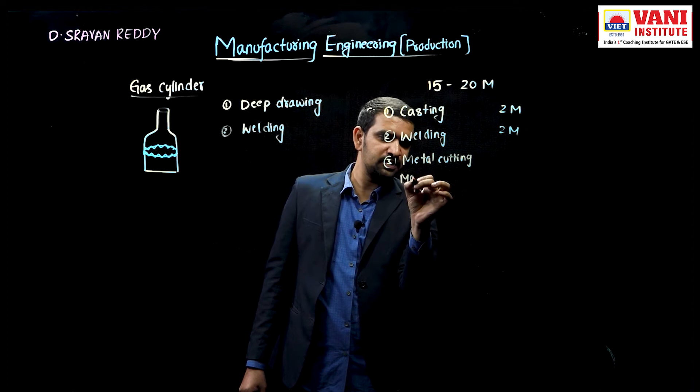The details of topics which we will cover are: casting, 2 marks; welding, 2 marks; metal cutting, machining, non-conventional machining, 3 to 5 marks.

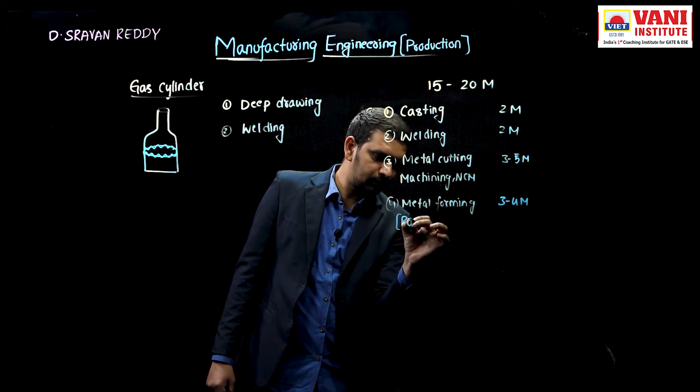Metal forming, 3 to 4 marks. In metal forming: rolling, extrusion, wire drawing, forging.

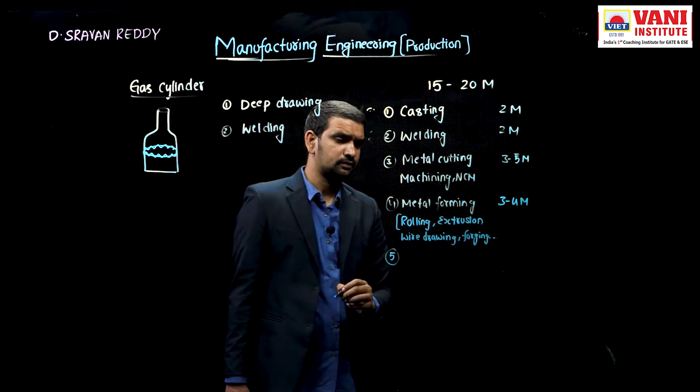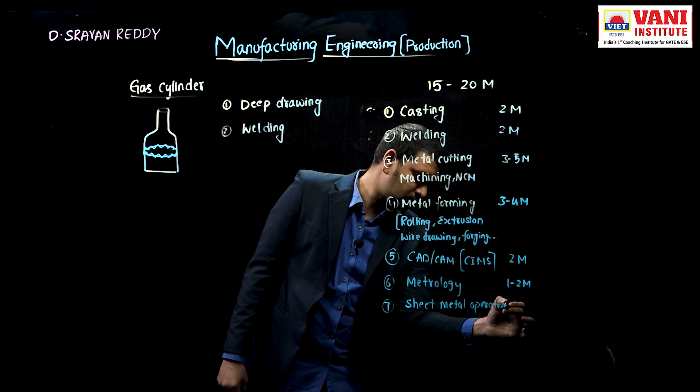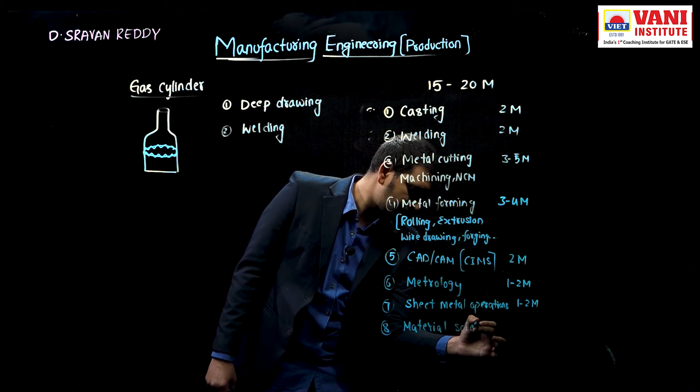The fifth one, CAD CAM or CIMS, 2 marks. Metrology, 1 to 2 marks. Sheet metal operations, 1 to 2 marks. Material science, 1 to 2 marks.

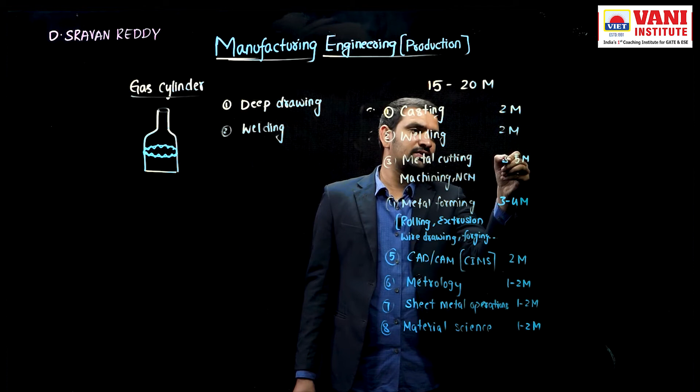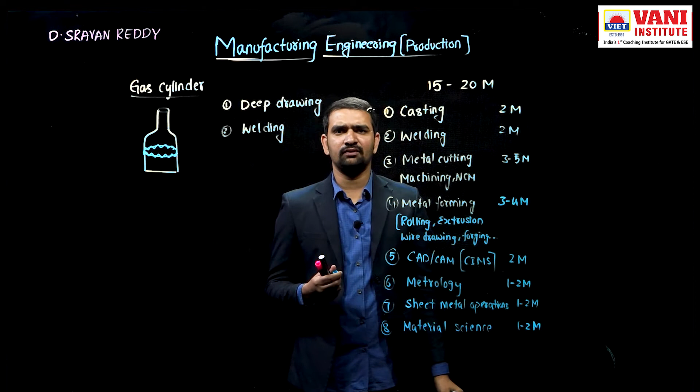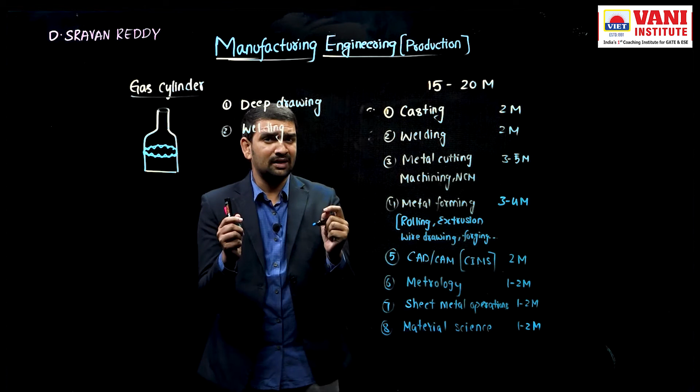If you count this: 7 this side, 7, 10, 12, 13, 14, 15 - minimum marks are 15, maximum marks are 20. In 2008 and 2013, from manufacturing engineering, 20 marks were asked, but every year 15 marks are asked from this subject. So if you focus on this subject, getting 15 marks is very easy.

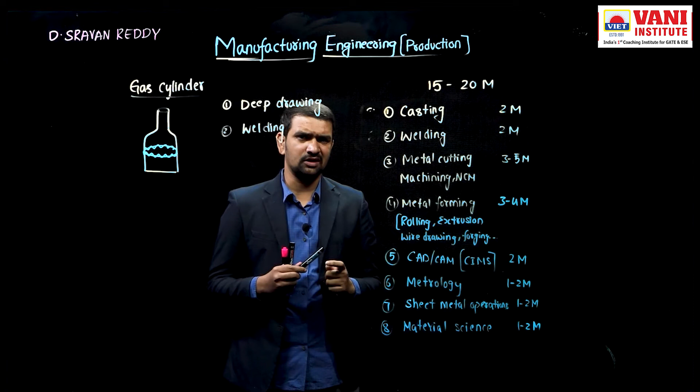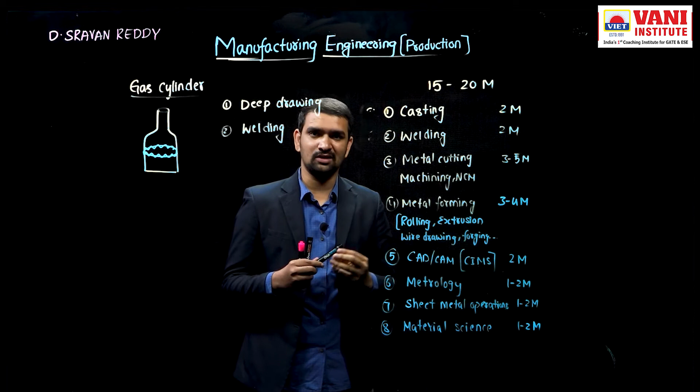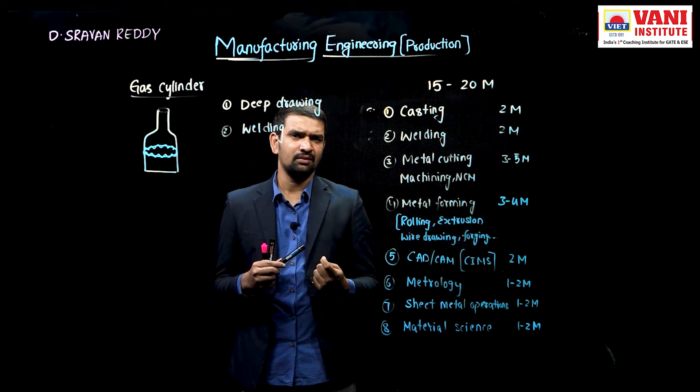Most students think that manufacturing engineering or production is a theoretical subject. But from the GATE point of view, out of 15 marks, 11 marks are only asked from problems. Only 4 to 5 marks are based on theory. Why does the examiner focus mainly on problems and not theory?

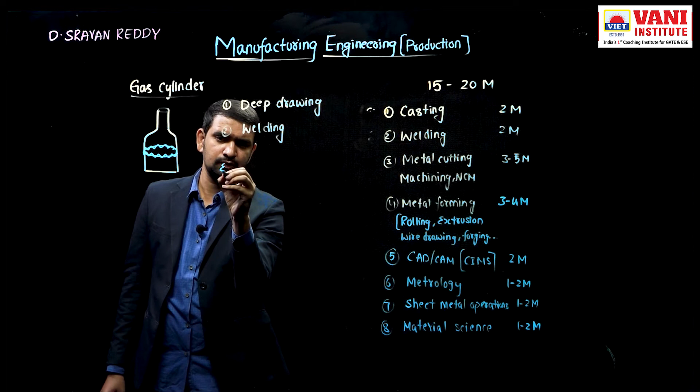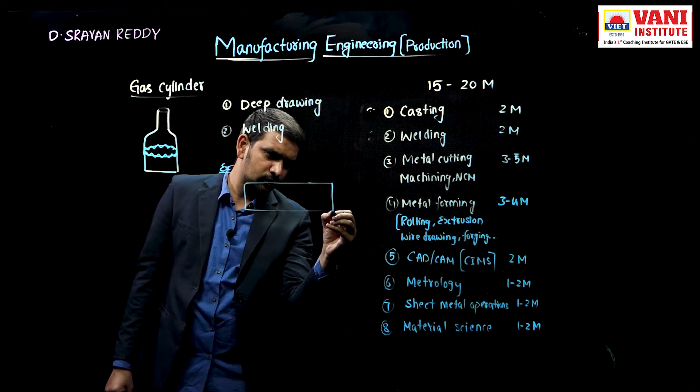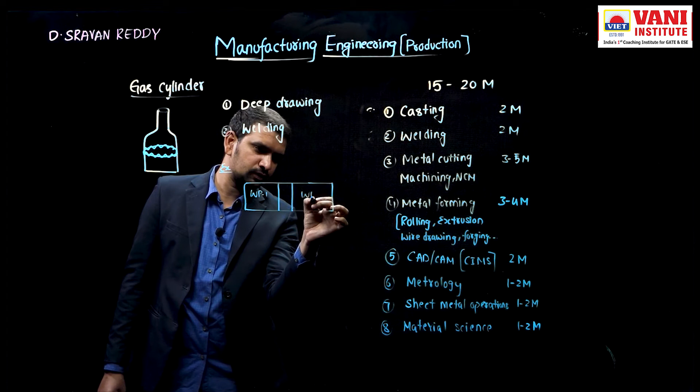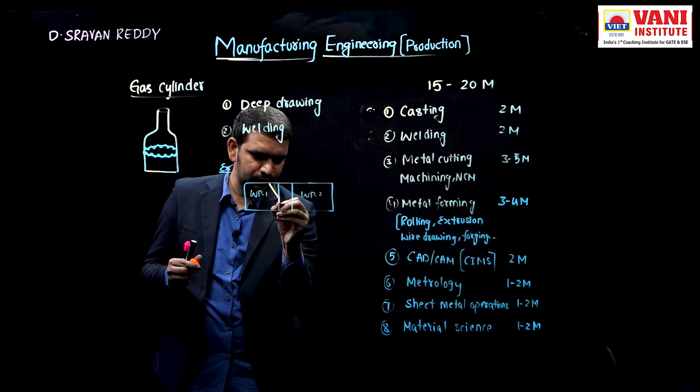Let us take one more example here. We are going to join two workpieces - this is workpiece 1, this is workpiece 2. After taking these two workpieces, you are doing the filing. After filing, the contact area increases.

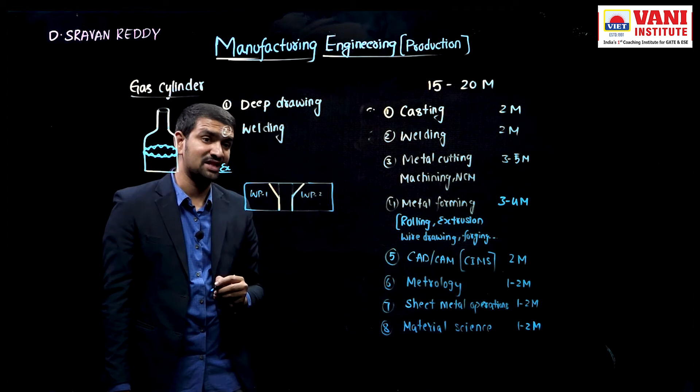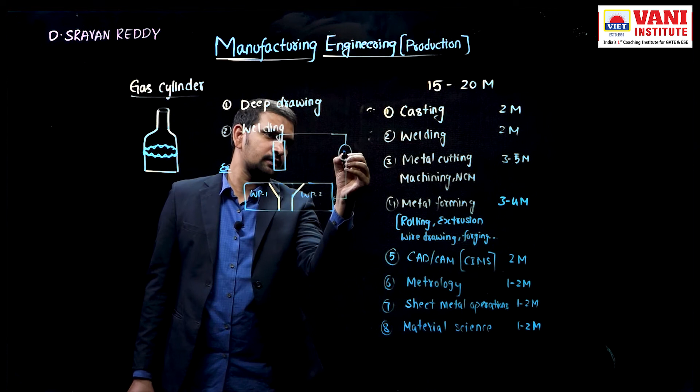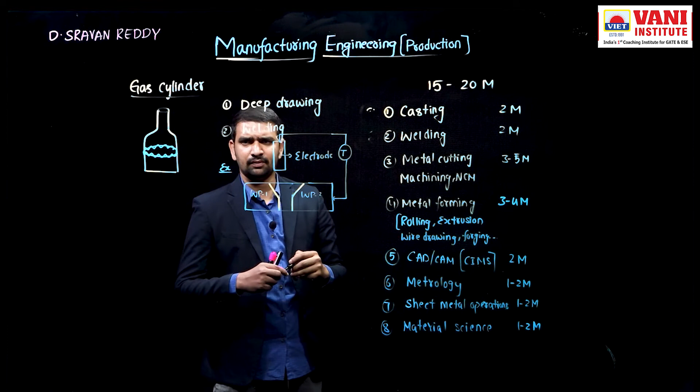Now we are using the arc welding transformer. In the arc welding transformer, for joining these two workpieces, we are using one electrode and a transformer - this is the transformer, this is the electrode. Before starting this, I am asking a few questions.

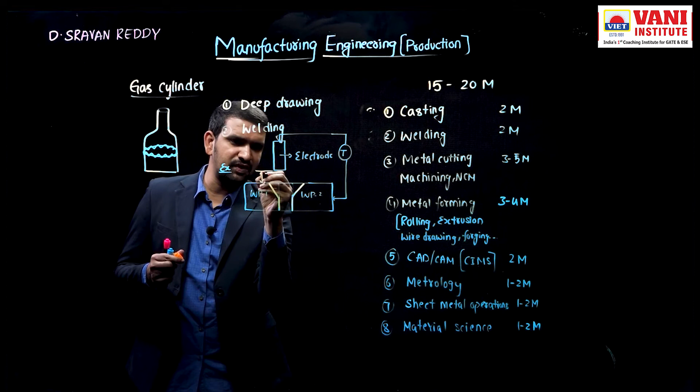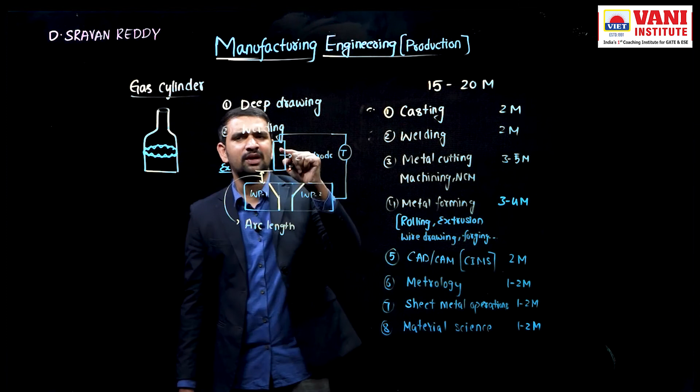Did you measure the distance between the electrode and workpiece? If you measured, what is the distance? What do we call this distance? We call this distance the arc length. My question is, why do we need to maintain the arc length? If the arc length is 0, what will happen?

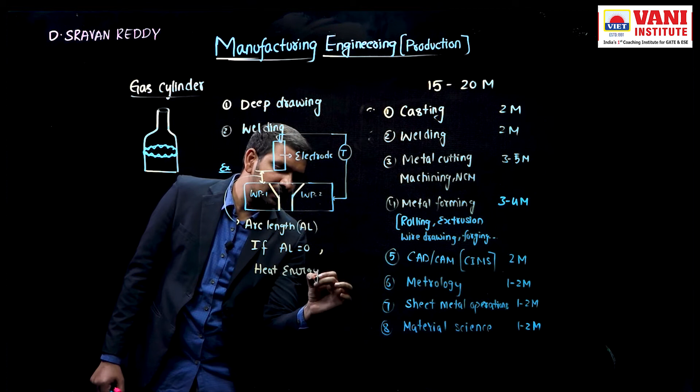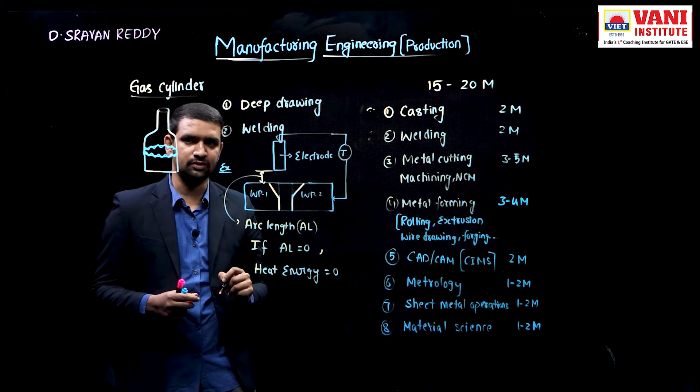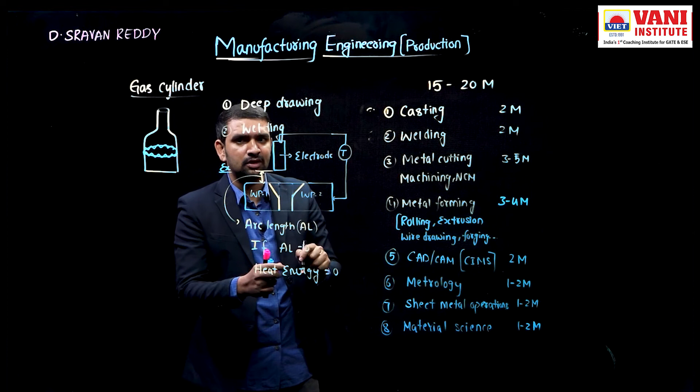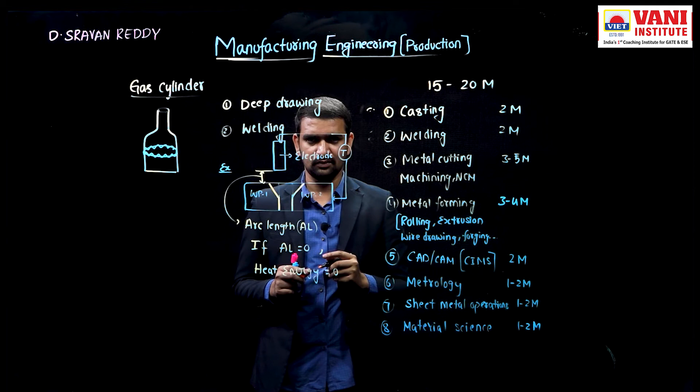If the arc length is 0, you know that heat energy is 0. Why is the heat energy 0? Because the circuit becomes a closed circuit, and if the circuit is closed, arc will not be produced. Or if you are maintaining too large a gap, in that case also arc will not be produced. We need to maintain the arc length within a range. In most cases, arc length is equal to the diameter of the electrode.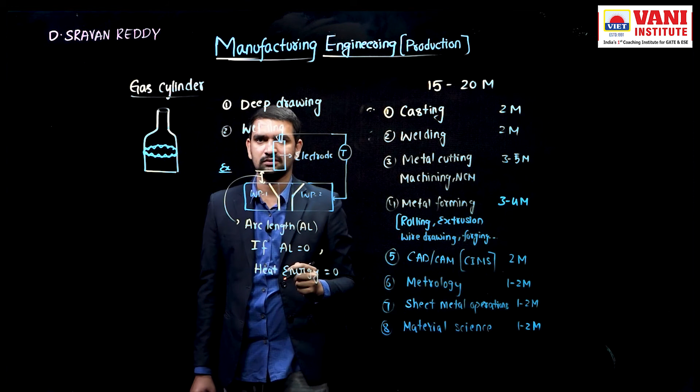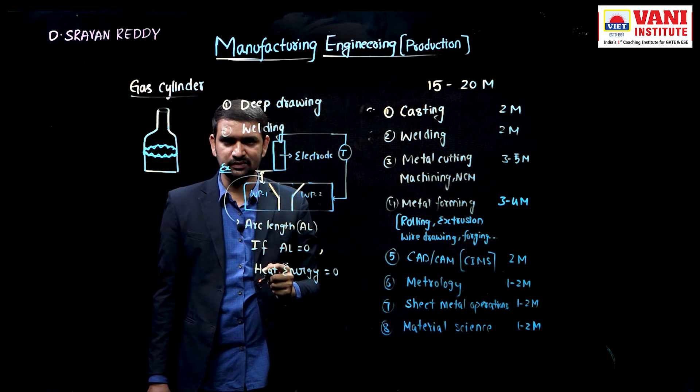One more question - we are supplying voltage and current. Can you tell what is the voltage range and what is the current range? Many students think the voltage range is 220 or 240 volts, like a bulb. This is not the bulb for telling that answer - for a bulb, voltage is 220 or 240, but in arc welding, the voltage used in our lab is mostly less than 100, though you can also use up to 200. There is no restriction, but in most cases the voltage range used is less than 100.

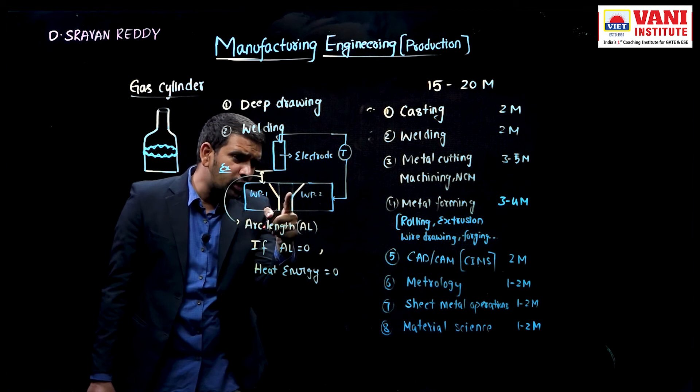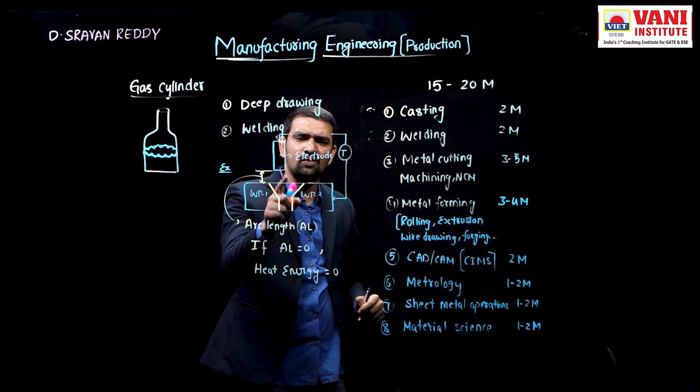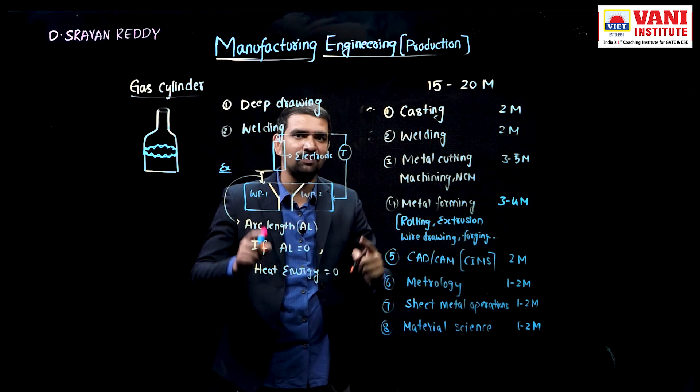One more question - before starting, first of all we should know how much heat is required for joining these two workpieces. How do you calculate how much heat is required for this weld bead? Based on that, we need to produce that amount of heat with the help of voltage, current, and time. If you don't know how much heat is required, you won't know how much heat should be supplied.

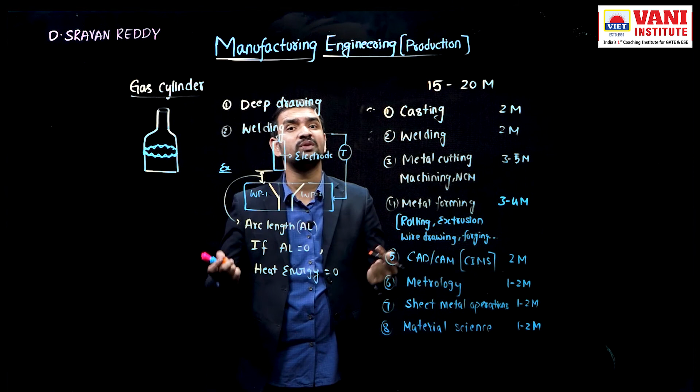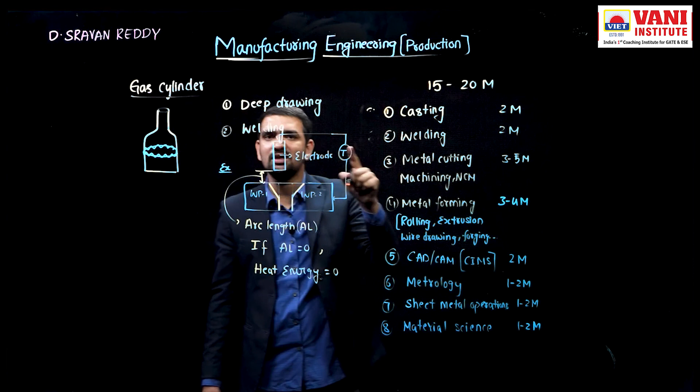At the same time, if you are supplying certain power, how much heat is generated? Of this heat, how much is lost through convection, conduction, and radiation? Exactly what amount of heat is taken by the weld bead? If we are not concentrating on how much heat is taken by the weld bead, and if the weld bead is not heated properly up to its melting temperature and not fused properly, it will affect the strength of the joint.

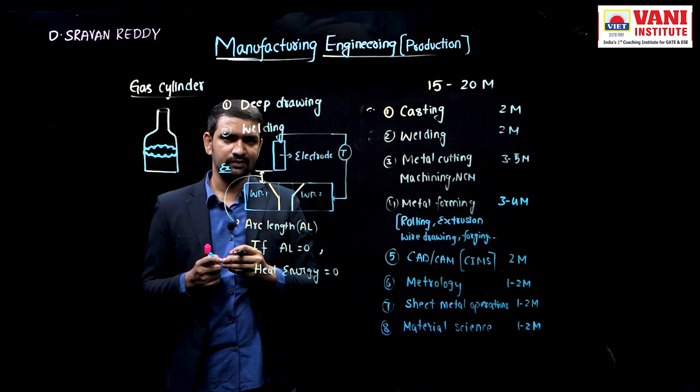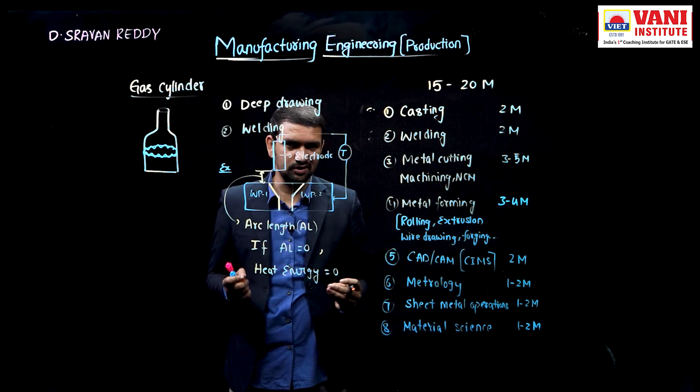Knowing all this is very, very important. The examiner mainly asks about the efficiency of welding - thermal efficiency, heat transfer efficiency, melting efficiency. You may not have heard all these words in your curriculum or while studying in college.

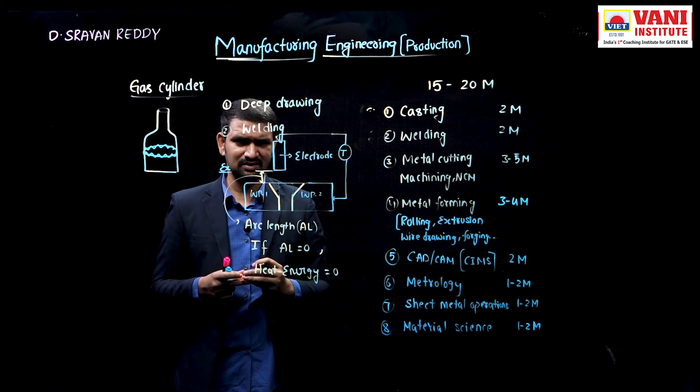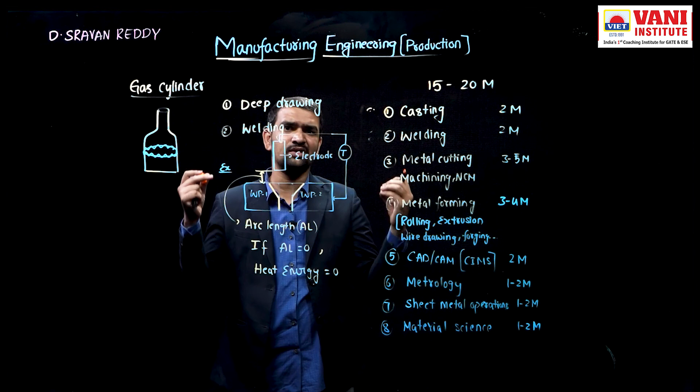But these are things actually required for any engineer. I've only asked one or two questions - like this, many questions are there. Once you listen to the complete course, you can easily answer any such questions in any interview. My suggestion is to try to focus on the subject and feel the subject while you are listening. Then automatically you will get the marks.